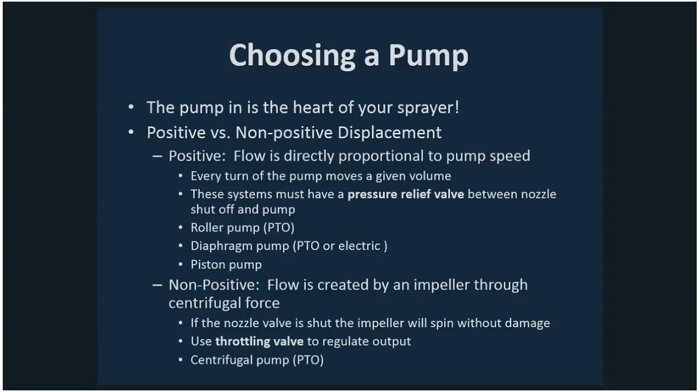You can shut the valve to your nozzles, and that impeller will just continue to spin freely without damaging the pump. In this case, we use what is called a throttling valve, which basically controls the amount of flow going out into the boom and nozzles. An example of this would be a centrifugal pump.

So how do you know which one to choose? For one thing, look at your power source. In a lot of cases, your power source is going to be maybe a tractor PTO. In some cases we would use an independent small, maybe 2 or 4 stroke gasoline engine dedicated to the pump. In some cases it would be electric, meaning 12 volt, say a battery operated from a tractor, ATV, lawnmower battery, whatever it might be.

Make sure for some of these that your pump and source spin in the correct direction. The big difference is between a tractor PTO and our independent 2 or 4 stroke engines. Sometimes the spin of those would be opposite of what some pumps would be. It's very easy to check, usually they will list on your pump the direction, so make sure those match up. Otherwise you'll be less than enthused with the initial result.

Just basic housekeeping things to save yourself maybe a headache in that purchase. Know your approximate output size that you need to pump. You're going to be able to calculate this by looking at the total volume per acre you're looking to achieve, and from there look at your nozzle size and the number of nozzles. Some of this will make a lot more sense as we get through those components. You'll see the different nozzle sizes and things, but a lot of it starts at that initial spray volume you're looking to achieve, and hopefully by the end of the presentation we'll have given some more guidance on that. But you want to know where you need to go, so that way you have a pump big enough to deliver what you need it to and the pressures you're looking for.

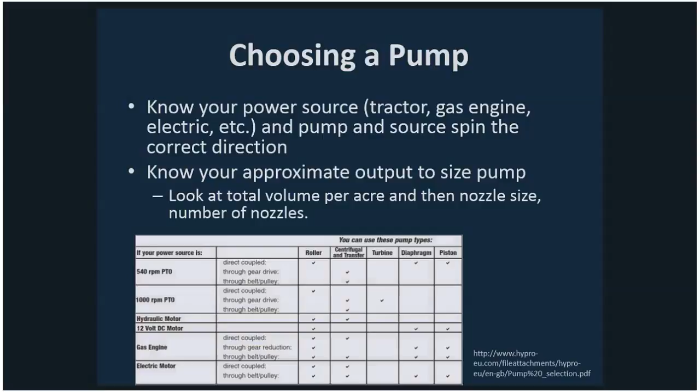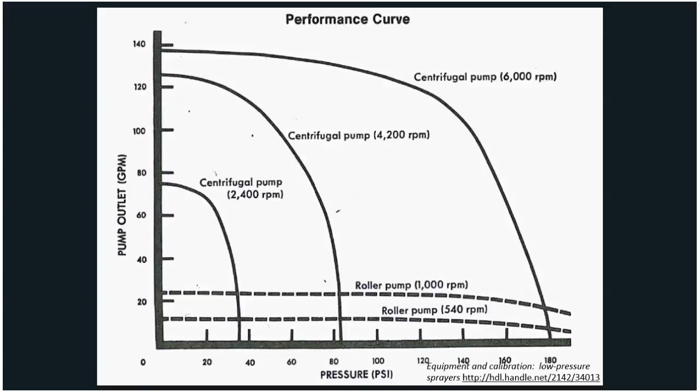So the bigger your sprayer is, you may need to move to something like a centrifugal pump, which in many cases, if you're needing a higher volume, is good because you can move a large volume of water fairly quickly. However, the pressure ranges on it tend to be maybe not as high as a given roller pump would be. So that's just one illustration: if you're looking for pressure with a smaller pump or smaller setup that needs higher pressure, or you have a little bit larger pump and sprayer setup needs, in that case maybe a centrifugal pump would deliver the volume you need and still give you adequate pressure.

So we're going to jump into just a slide on each of these different types of pumps. So, roller pumps. These are, of any of them, probably fairly economical, compact, easy to use. They're repairable - the rollers inside, there's rebuild kits for seals and rollers. Their output is anywhere from roughly 5 to 30 gallons per minute, and you can achieve some fairly high pressures if needed with them. They are a little bit more prone to wear from abrasive materials in the spray solution, so rollers and things can wear over time. Not that it can't be used, but if you're using maybe dry products that are more abrasive or flowable products, you may have to rebuild that sprayer every once in a while compared to some others that are a little more durable to wear.

By and large, for a lot of our tractor sprayers, roller pumps are probably one of the go-to pump types that we would utilize. They're fairly effective. They do self-prime, which means that a good roller pump will suck uphill a little bit to pull that solution in. Some pumps do not do that, so you have to make sure the tank is mounted above the pump, so that way you don't have issues getting the solution to start flowing through the pump.

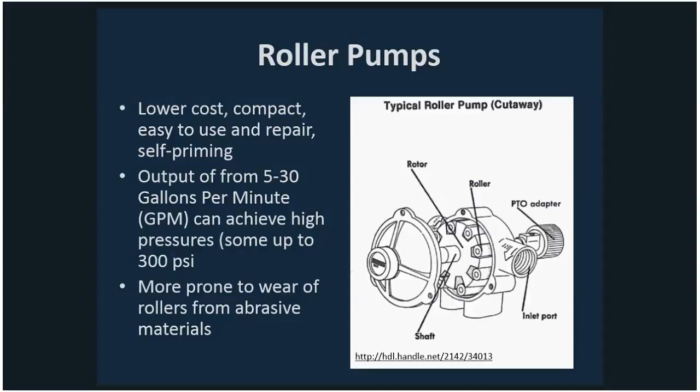Centrifugal pumps are probably one of the next popular ones for tractor sprayers. They are very durable and have a simple construction. Again, these are non-positive displacement, so you use a different system for modifying pressure. They have a lot higher potential for volume. So if you need moderate pressure for a boom sprayer but need volume, not high pressure over 100 psi, a centrifugal pump can be a really good choice for a modest size sprayer needing modest pressure but high volume. It also handles abrasive materials better because you don't have that wearing action like you would, say, on a roller pump.

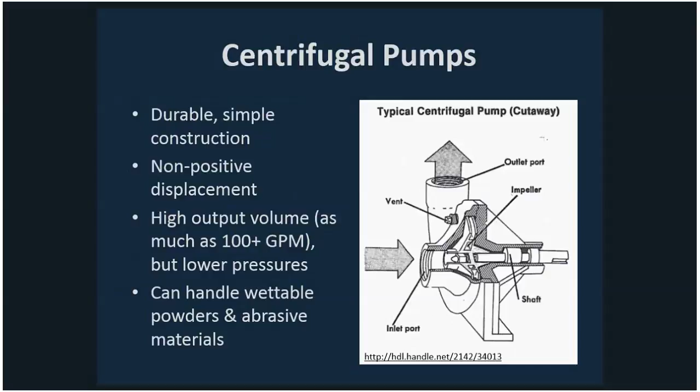Diaphragm pumps have basically a synthetic diaphragm with cylinders underneath that pump to create that pressure and pull. They have a pretty wide range of flow and pressure capacities. They are good for corrosive and abrasive materials, whereas a lot of our others have metal components that can be prone to corrosion. The fluid part is usually encapsulated inside that synthetic, usually rubber type diaphragm. So if you're using liquid fertilizers or some solution that tends to be more corrosive, these will handle that much better.

Diaphragm pumps are also one of the more common pumps you'd see for small ATV sprayers and other 12-volt pumps. Often these are self-regulated on ATV models with an on and off pressure switch because they're electronically controlled. In this case, you would treat it a little more like a non-positive displacement pump, using a throttling valve if you're trying to adjust pressure beyond the internal regulation of that pressure switch. Otherwise, if you have a PTO or other engine-driven diaphragm pump that's continually spinning, you would need a pressure relief valve so it doesn't build up pressure when you don't have the sprayer boom on.

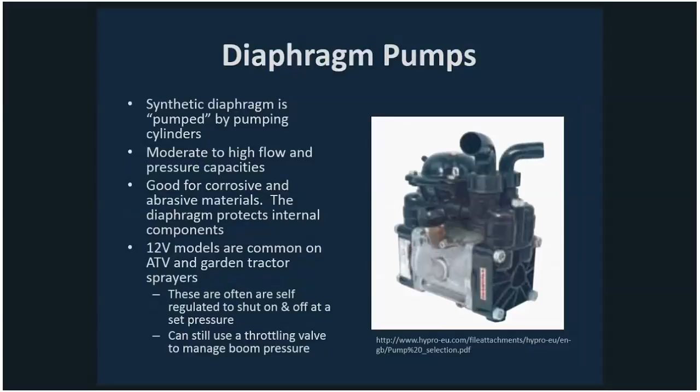Piston pumps are also out there. They function very similarly to how a gasoline engine pump functions, with pistons and valves to move the liquid. They are fairly low output, but they do obtain some really high pressures. I will say piston pumps are not extremely common. You might see these on smaller sprayers where you just have a wand and are trying to achieve higher pressures, maybe for spraying fruit trees. However, more commonly, I think we see more small diaphragm pumps, especially electric ones, utilized than piston pumps. Oftentimes our pressure washers utilize piston pumps to get that high pressure with fairly low volume. But for spraying pesticides and other crop protection, we don't see these as commonly as the other pump styles.

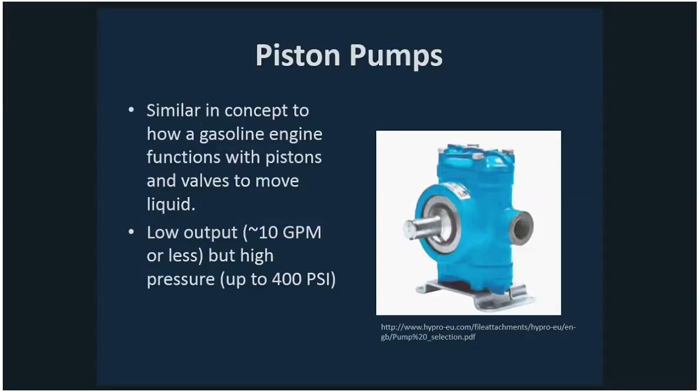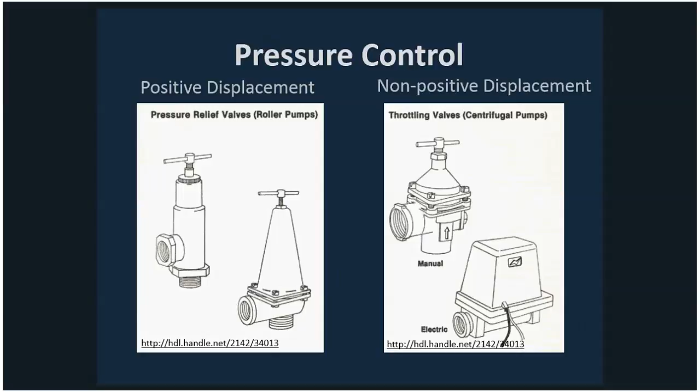Agitation: in-tank agitation for our materials is really important, especially if you have dry or flowable materials that settle out easily or need extra help to mix. Even if you do your best to keep a strong stream of fluid when adding those chemicals and components, there's still a tendency, especially with no agitation, that if the tank sits still for any amount of time, things will settle out without some form of agitation in the tank.

It'll be really hard to get those particles back in suspension, which is not good for screens and nozzles because those particles can plug up inlets and other things. You also need to have a consistent, even spray solution throughout the tank, because the active ingredients you need may settle out in the material on the bottom, and if they're not thoroughly mixed in, you might end up spraying a really weak solution at first and then a too-concentrated solution at the end. So I always encourage some means of having agitation in a tank, and we'll talk more on ways to achieve that in future slides.

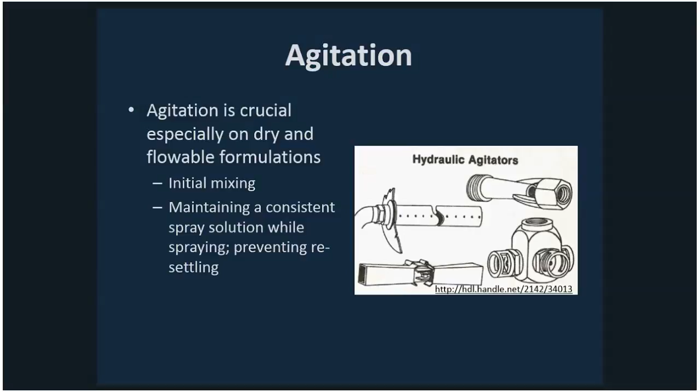Also, strainers are a really important component. In some cases, we want inline strainers between the tank and the pump, or in some cases after the pump. Some of that depends on the system, which we'll address in the next few slides. But for the most part, we do want to make sure we have screens in our nozzles.

These are basically small screens that fit up inside the nozzle body that hold our different sprayer nozzles. There's two pictured here in the red picture below: a ball check, on the left, and a non-ball check screen. I'll talk a little about when we need to use each of those.

Note also that all these nozzle screens are color-coded by size. The red one is a 50 mesh, shown here. Green is 100 mesh, and there are others above and below that. Mesh means holes per square inch, so the larger the number, the smaller the holes, and the more holes per square inch, the finer the screen. A lot of what screen you choose is going to be based on the specific nozzle.

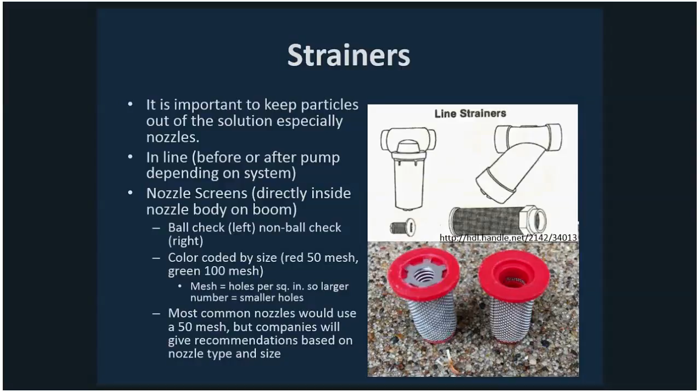Boom control valve: whenever you get all these components together, you need a way to control the flow out to the nozzles and sometimes different sections of the boom. On larger sprayers, even something with a 10 or 20 foot wide boom, you can get devices that allow you to turn on or off all or parts of the boom, some of which are shown here. In this case, all of these are set up for basically 3-section booms, a lot of times with a left, center, and right section. I'll show some other pictures.

These are manual versions, some of which have individual levers that you throw for each section. Also, in the image on the upper right, there's a combination valve where you rotate the lever, and depending on where it's rotated, when you flip it up it will turn on 1, 2, or 3, or all sections of a given boom.

Then there's the electronic version, an example of which is shown below, coupled with electronic valves and an electronic pressure regulator. In this more advanced system, you can actually control your pressure through either a throttling or pressure relief valve electronically. You have subsections to turn on or off left, center, and right booms, and there's a master switch so you can easily turn on or off the whole works.

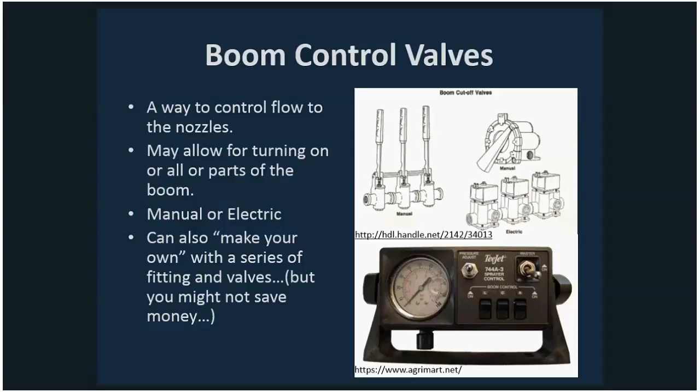So do a little budget work. There are some situations where it does make sense to plumb something yourself, but keep that little note of experience in mind.

So, positive displacement pumps and systems. How would you plumb it?

This slide, and the next one, gives some really good illustrations of all those components. I wanted to outline those before showing you this, so you'd know what these individual components look like prior to that.

Let's start with the tank, because that's usually where we need to start with our system. As you go down from there, you will have, in this case, a roller pump or any other positive displacement pump.

It would be good to have a strainer, or inline strainer, in that system that will catch pieces, especially for some of the positive displacement pumps.

They can be a little finicky, and damage can be caused if a particle or piece gets into the pump. So you want a strainer in there to catch some level of debris.

That does not necessarily need to be as tight of a strainer and screen as you would put on your nozzles, but it's mainly just to remove some of those larger particles.

From there, you can also go ahead and put an additional strainer on the other side of the pump, and this will help catch some smaller pieces.

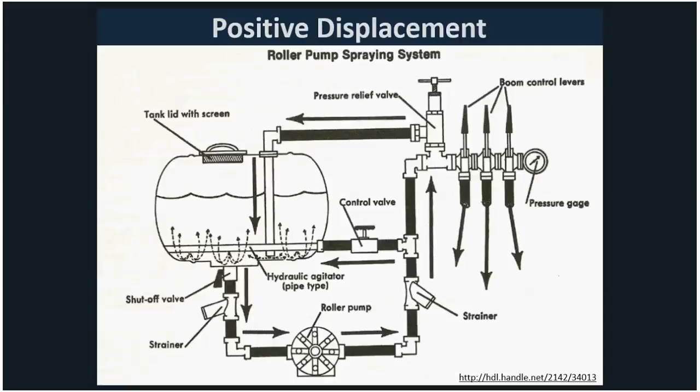All right, so a non-positive displacement system. So this is a centrifugal pump. So this is a lot of similar concepts. In this case, they've showed a little bit different options in this. I won't go in maybe as much detail, but I'll hit on some of the highlights.

So in this, you're not necessarily going to need to have a strainer between the tank and the pump. Centrifugal pumps have the ability, due to their nature, to handle small pieces and particles, so that's not nearly as potentially problematic. However, it would still be good to put a strainer on the other side, so that way you are removing any impurities that might then be heading into the rest of your system, control valves and other things, especially larger pieces.

As you go on up, you would again need agitation. This has a different form of agitation that has more of kind of a jet agitation, which in this case they're showing being plumbed in from the bottom of the tank. For smaller tanks, you can also put a threaded bung or drill a hole in the side of your tank and just put one of these jets in the side of your tank, and it would be able to agitate across the bottom in that similar location.

Larger tanks, it would be a good idea to have things going out in multiple directions, so you make sure that you don't have too many maybe dead spots or voids in flow where material could settle out.

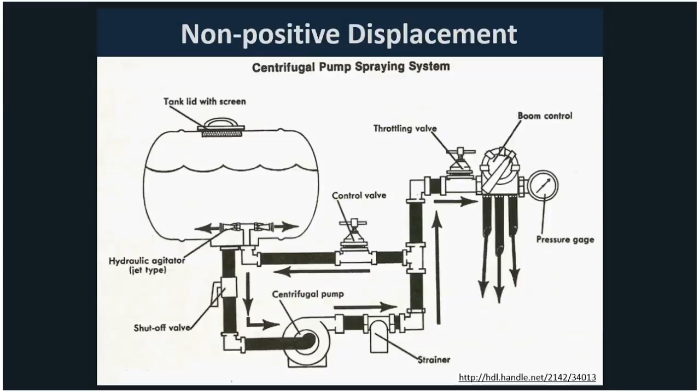Here they show one of those rotary boom controls that again is manual in nature, but has multiple positions to control all or separate sections of the boom. All right, so that's a little bit about that. We spent a little more time there, but that's a very important kind of starting point as to where to go when you're trying to actually figure out how to put all these pieces together.

So a little bit more on some notes on components. Tanks. Polyethylene or stainless steel are probably the best materials. I would say by and far, most all of you are going to have some form of a polyethylene tank. The stainless steel is nice if maybe you buy an old sprayer and it happens to have it, but obviously the stainless steel is more expensive and certainly is not necessary. I think the polyethylenes are common, many shapes and sizes available, and work great.

Avoid using galvanized tanks, which were sometimes used if you had maybe bought an older sprayer, due to the corrosiveness of even just some of our common products and pesticides, not to mention just having water or liquid in them. Over time, if they're older, they get some rust in them. You get rust flakes, and rust flakes never do good things for sprayers, especially sprayer nozzles.

Sometimes you may have some older sprayers that have fiberglass tanks. If the tank's all right, that would be fine. I would not go out of my way for this, and do watch because some of these fiberglass can get brittle with age. And so that would not be something I would seek. Again, if you happen to have it, I wouldn't be as worried about the corrosive part of fiberglass as I would the galvanized. But just some notes. Polyethylene is probably going to be your go-to.

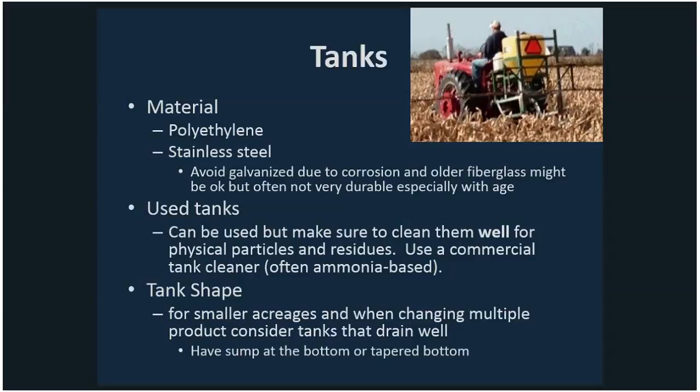Sprayer booms. There are tons of different configurations for booms for sprayers, and a lot of this should just coordinate with your ending desires and goals. So, big field sprayers have booms as much as even 90 or over 100 feet wide. Well, most of the time for some of our crops, you're probably not talking about that, but a boom can be as simple as one nozzle that's spraying 15 or 20 inches wide. You're in complete control of how many nozzles and where you configure them. It could be something very specific to your needs, and you can run a line and a nozzle and clamp it on a boom, and you're good to go.

If the boom is very wide, you should have some form of breakaway system. Oftentimes, this has some system of springs or something that would hold the boom mostly in place, but if you touch on something, it would swing forward or back and give it at least some level of flexibility. Although you might think that you're a really good driver, if you have even a 10-foot wide boom, sometimes when you're trying to do this, that, and the other, it is easy to catch a fence post or a tree branch or something. And with even a little bit of forgiveness, that boom will bounce back and be completely unaffected. However, without that, you can have some booms that you have to straighten at the end.

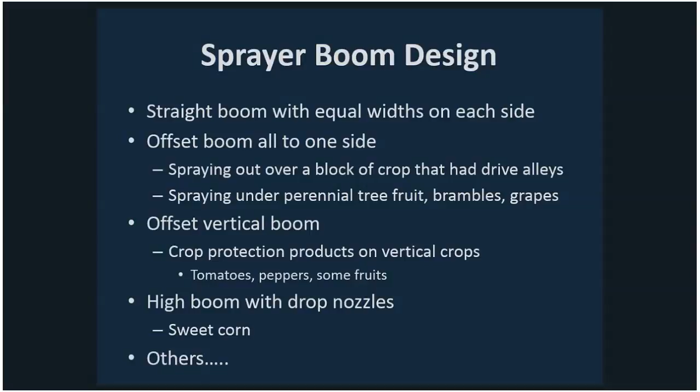So there are 2 different types of booms that we would utilize. You can use a dry boom, in which the solution flows via hoses and nozzle bodies, and those are attached to a separate rigid frame. This is the most common and most simple to assemble, and manufacturers almost all make nozzle body clamps that will fit on various tube shapes and sizes. So it's easy to mount those nozzles on, say, a rectangular or round pipe or box tubing.

Wet boom is another option. This is where the solution actually flows through the pipe that is also the structure of the boom. So you have a round pipe, and a nozzle body that clamps around that pipe, with a hole drilled in it to access that. This allows for higher flow rates and a better ability to clean and flush the boom. You have fewer barbed connections between hoses and nozzle bodies, so it's a lot cleaner inside for flushing out.

Now the struggle when you're making these on small scales is that the best thing to use for that actual wet boom is going to be stainless steel, because of the corrosive nature of things. Older sprayers did use galvanized tubing for that. I don't necessarily recommend that. And in some cases there could be some plastic products that are also useful.

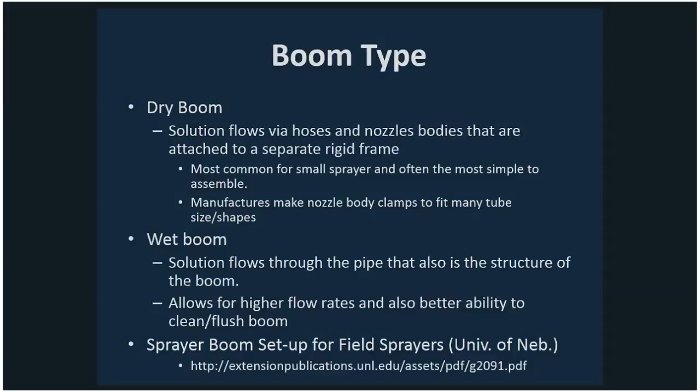All right, nozzle spacing. So looking at your boom, how are you going to space your nozzles? The standard would be 20 inches between nozzles. That is kind of an industry standard. You can adjust to really anything you want. Typical range would be anywhere from 15 to 40. I would say unless you have a specific need for something otherwise, 20 is perfectly adequate, and I think that would be a go-to starting point.

So why you would go different would be to space things based off of sprays between crop rows. Say, for example, use a 15-inch spacing and use every other nozzle to be able to direct a spray between 30-inch rows. In some cases, our sprayers may be used even to deliver maybe liquid nitrogen fertilizer between corn rows. In that case, if you have 20-inch spacing and 30-inch corn rows, you end up having some math that doesn't work out every once in a while. So if you do a 15-inch nozzle spacing, you could use every other nozzle and get that desired distance, so that way you can go in and make that kind of application.

Same way with, say, drop nozzle applications for the sweet corn example I mentioned. Most all of your calibration tables are based on a 20-inch spacing. So if you have more or less nozzles per given foot of spacing, you need to adjust your calculations when you utilize those tables, and they will note very clearly how they're calibrated. But 20 inches is by far our standard spacing.

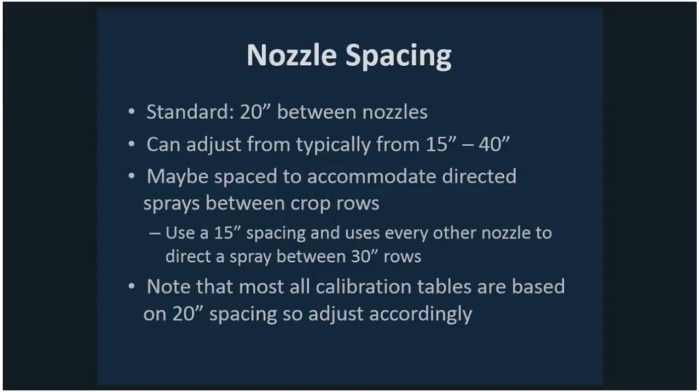So, nozzle body and screen suppliers. There are all kinds of companies out there. Again, these are not endorsements, but merely starting points, so if you're lost, at least you have some places to start with. TeeJet, Hypro, and also Greenleaf are some brands that deal directly with agricultural sprayers.

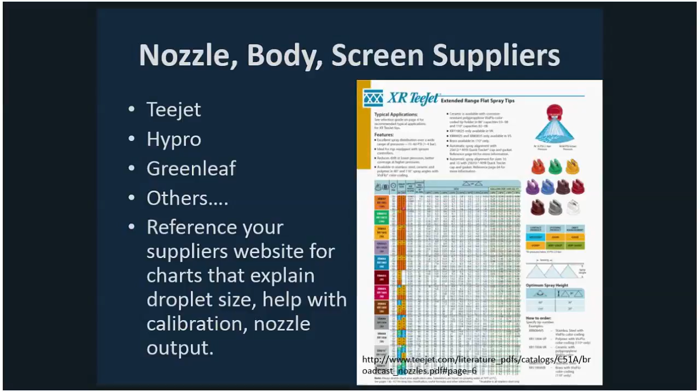For one thing, it is good that it holds a solution in there, so as soon as you turn the boom back on, usually you instantly get flow. You don't get air pockets and voids in there from solution that's dribbled out. Especially if you're spraying herbicides and you turn over something else, you can often see the little dribble marks where it will maybe kill things when you're making turns and other moves, if those nozzles don't stop dripping. Not essential, but something to consider.

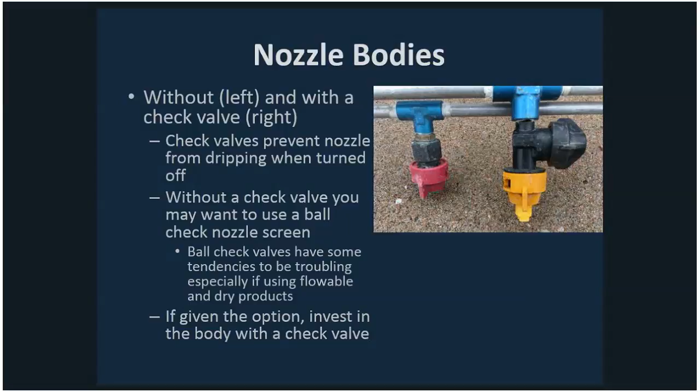They do work, but it's something you probably want to make sure you clean your screens, and certainly don't just park the sprayer and leave it full of a thick solution that could clump up. If given the option, this is just my opinion, but if I was starting fresh, I would invest in the check valves built into the nozzle body. They do work really well, and they are less troublesome than the ball check screens.

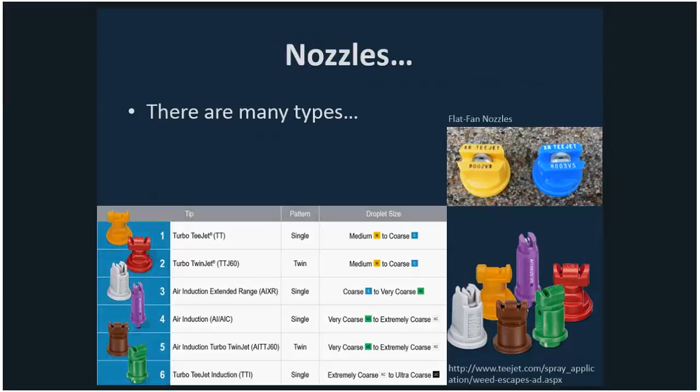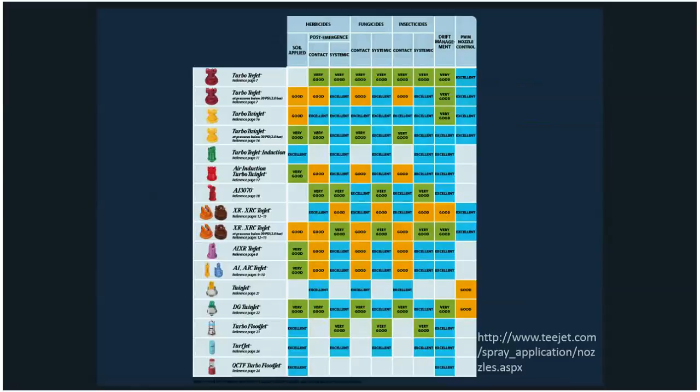Here's another more detailed screen. Again, for consistency, I just continued with the TeeJet, and I think there were another two or three pages like this of different nozzles. Some of these have minor differences between them, but this gives you a really good idea of the amount of diversity that is out there. This also rates them for the different products they would be useful for. So again, lots of different options out there when it comes to nozzles, all of which have pros and cons one way or another.

One thing I wanted to highlight that I've utilized - if we think of crop protection, especially some of our insecticides or fungicides that we're spraying over dense canopies, we'll need to try to get really good coverage with this dual orifice nozzle, which you can see here. This basically makes two streams or bands of solution rather than just one straight down, and they throw out at an angle, so as you're driving, one's angled forward and back. These really help get under dense leaf canopies and do a good job of getting good coverage. So you might invest in this, especially for insecticide and fungicide sprays, if you don't have an air blast sprayer and are still needing to achieve good coverage.

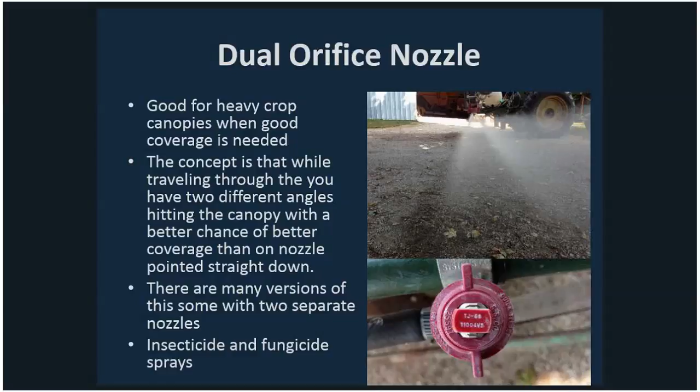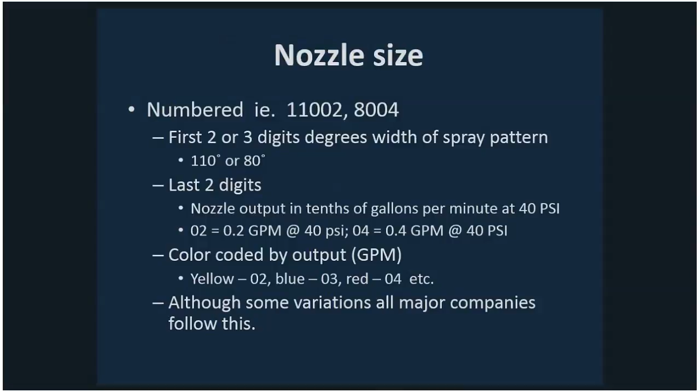Nozzle size - you'll see these numbers like 11002 and 8004. Basically, in this case, the first two or three digits are the width of the spray pattern. As you would look at the nozzle from behind, that's the degrees of the spray, so 110 gives a wider pattern than an 80. The last two digits would be the actual gallons per minute, showing you the output measured at 40 psi, which is a standard across most all companies. That is in tenths of a gallon per minute. So an 02 nozzle, such as the 11002 I listed, gives you 0.2 gallons per minute at 40 psi. An 04 would be 0.4 gallons per minute. They are all color coded - most companies utilize the same system, like an 02 would be yellow, blue is 03, red is 04, etc. Those colors are very meaningful, and once you know that, it's a good go-to to understand what nozzle size you're dealing with.

So what are some general recommendations to boil this down? Your nozzles can have a huge impact on your spray effectiveness, and this is again just a brief snippet of what we could go into. For herbicides, your flat fan, or maybe turbo-tee or air induction nozzles, would work. The flat fan does provide better coverage for your contact herbicides, but for some systemic products, say glyphosate for one, larger droplets are fine.

Larger droplets, like your air induction or turbo-tee nozzles, give you less drift potential. That's why we're looking at these, and why we like nozzles with coarser patterns - when we have these products, we can use larger particles and droplets, greatly reducing our potential for drift.

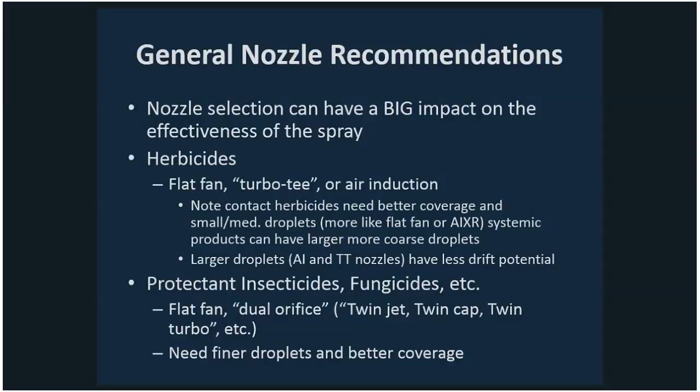Protectant insecticides and fungicides are often contact products, and I would look to a flat fan, a dual, or one of the dual orifice options. There's a twin jet, another company has a twin cap, there's a twin turbo nozzle - these have 2 jets and often give finer droplets, but also give better coverage with that dual angle spray.

So to wrap up, I want to add some details and give some sprayer examples. Some of these are ones that I actually have on my own small farm where I raise pumpkins.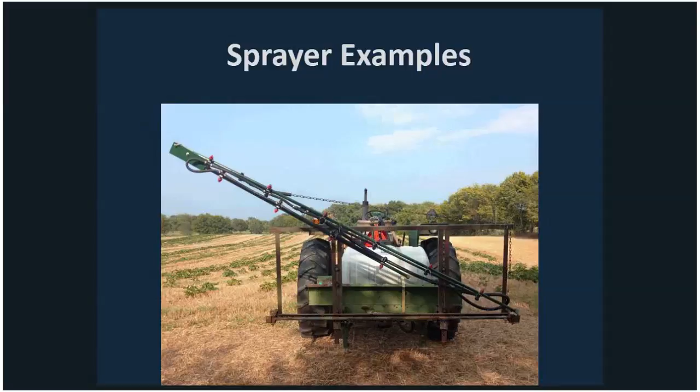This is a sprayer dedicated for insecticide and fungicide sprays. It was an old ag sprayer I picked up from a local grower, with a 300-gallon tank and a 40-foot boom. I switched it to about an 18-foot boom off to one side, mounted all new nozzle bodies, and got a smaller tank that fit my needs. You can see it extended in that picture.

I have 5-row blocks of pumpkins, and I can go down one side and back the other, thoroughly and effectively providing spray coverage to maintain insect and disease control. It works great, it's simple. I didn't bother with the other boom - for what it's worth, I'm perfectly happy backtracking down each side making those applications.

Here is how I plumbed it. This is a case where I went off and plumbed this on my own, and I think that was a fairly wise decision, considering I have all of this under one control. I didn't have a need to have multiple sections of this boom.

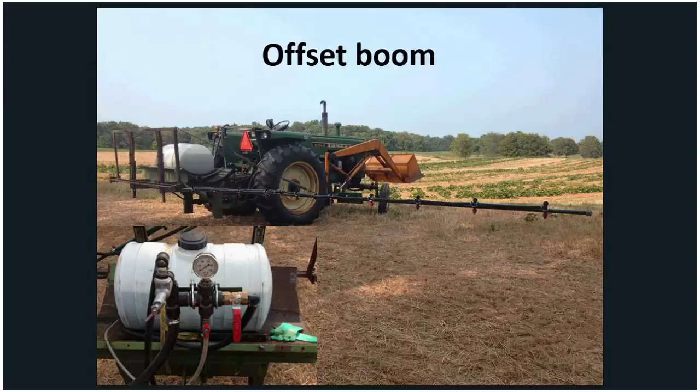You can see there's a line that comes down from the pump. There's a pressure regulator, it goes out into a cross in the center that goes up to a gauge, then down to a small valve for agitation, and that big brass ball valve actually turns on the flow to the boom itself. That's a very simple and effective way to do that where you don't need multiple sections.

So this is a different sprayer setup. Again, this is an old sprayer - one that was on our farm that my grandpa had purchased. I took it, cleaned it up a little bit, cleaned up some rust and paint, but from there I outfitted it with some new components.

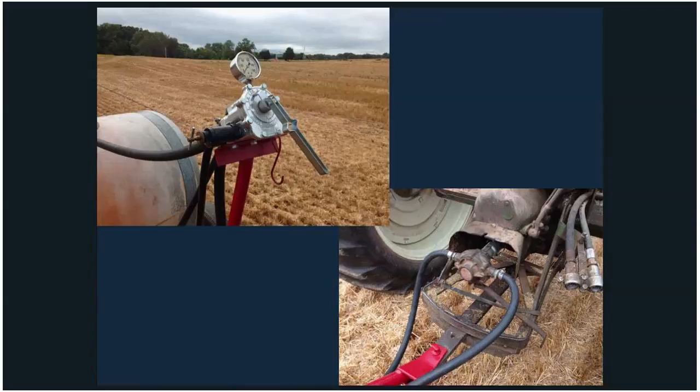So this would be something great for using for just general herbicide sprays. This has a boom that's 20 feet wide, which is definitely manageable for some modest to smaller acreages. In this case, there is actually one of those multi-position control valves for the different sections of the boom.

In this specific example, TeeJet makes this. They call it a T valve, a TEE valve. This has ports for a pressure gauge, ports for all three sections of the boom, and then a pressure regulator port where you can have a bypass line going back. In this case, we have a roller pump as pictured here in the lower corner, and that basically feeds the pressure for this specific system.

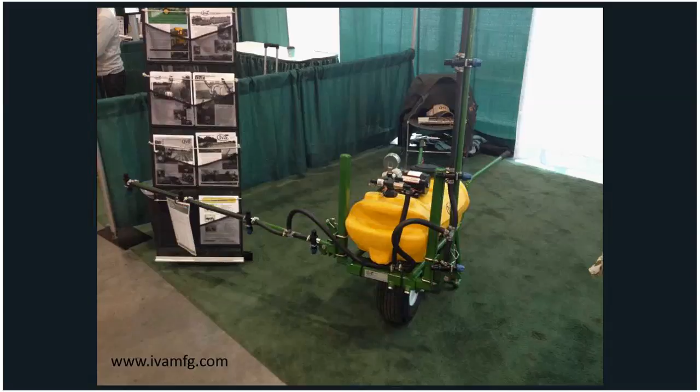One other thing I saw at a conference, and I don't have one of these, but it was an intriguing different idea and concept, is kind of a walk-behind sprayer. A manufacturer produces this - how I see it, it's basically a small ATV tank mounted on a single wheel, almost like a wheelbarrow type situation. They've made some small booms and plumbed it, and the plumbing would almost be identical to what you'd see on a larger tractor sprayer. The difference is they have a 12-volt battery mounted, which you can't see, and they have an electric pump. On top of the tank they have their recirculation, a control valve, and also a throttling valve to manage pressure. So walking at an even pace, with the proper protective gear, you can do a lot of applications with this. Note they also have pipes on the side of the tank that allow you to raise and lower the booms depending on the canopy you're trying to cover.

Some other general thoughts - our target spray volumes do vary by product, and I'm not going to get into all those details, but as starting points, a lot of our herbicides focus between 10 to 25 gallons per acre. 10 would be something I'd use for some products, 10 to 15 or 20 might be soil applied, and systemic products would be the lower end. The higher end could also be soil applied, but also your contact products that need better coverage, protectant fungicides and insecticides, especially on established crops. We often look in specialty crops and vegetables for a larger volume - 25 is probably a low end, in some cases 50 gallons, and in some of our orchard crops where we have even larger canopy to cover, we may be shooting for up to 100 gallons per acre.

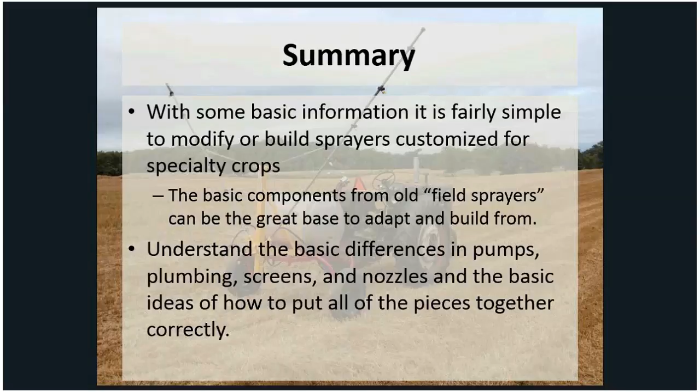Hopefully you can gain the differences in pumps, plumbing, screens, and nozzles, and just some basic ideas to help you put things together correctly, and then from there guide you further to help look at where you can go to ask more questions and kind of be knowledgeable where you need to start.